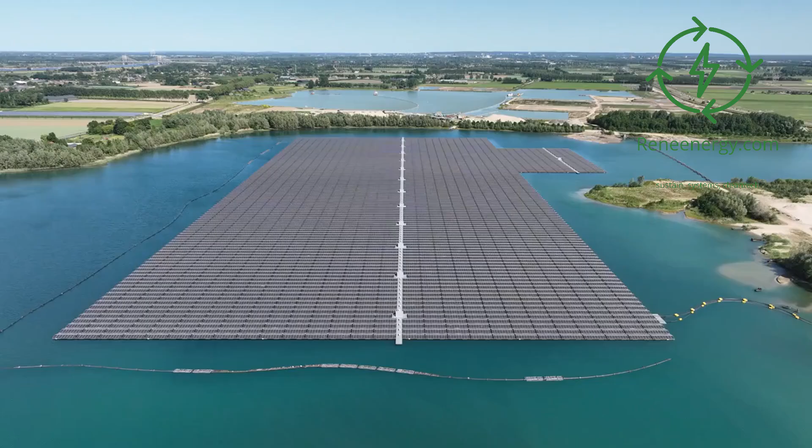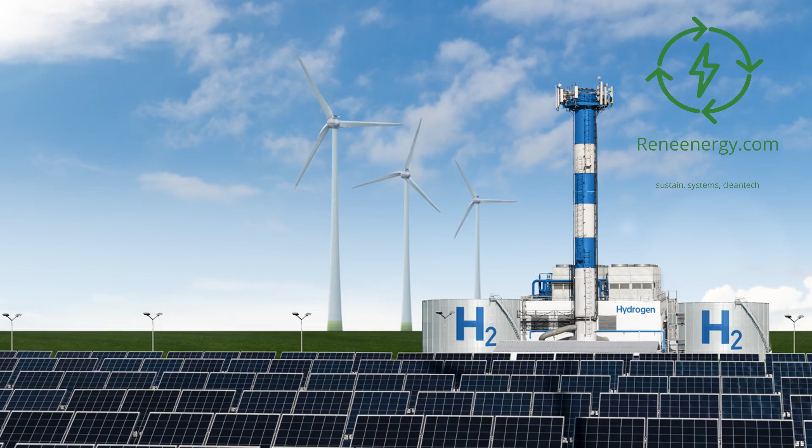Choosing the right technology for hydrogen production is crucial for the success and efficiency of your green hydrogen project. With the growing interest in hydrogen as a clean energy carrier, it is essential to understand the various production methods available and their implications for your specific project. This comprehensive guide will help you navigate the complex landscape of hydrogen production technologies and make an informed decision based on key factors such as resource availability, efficiency, cost, environmental impact, and scalability.

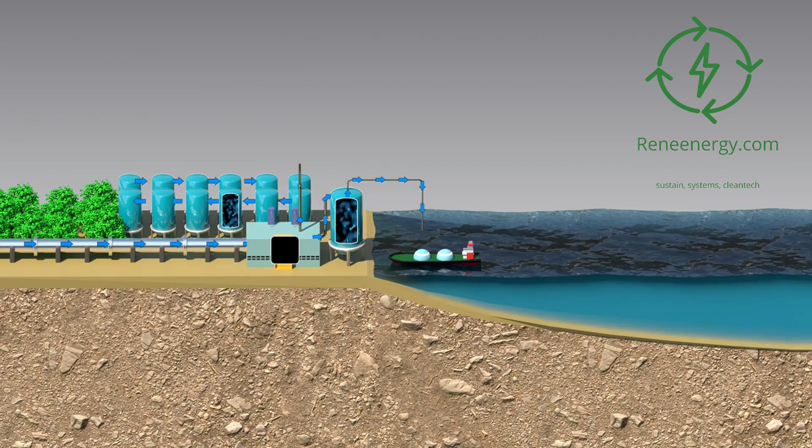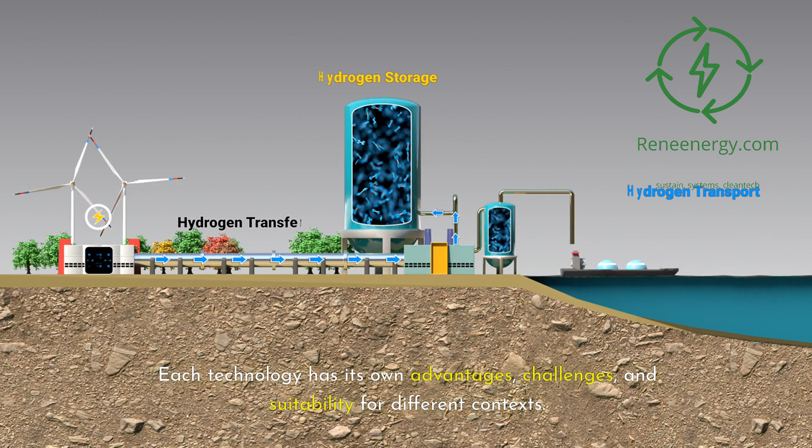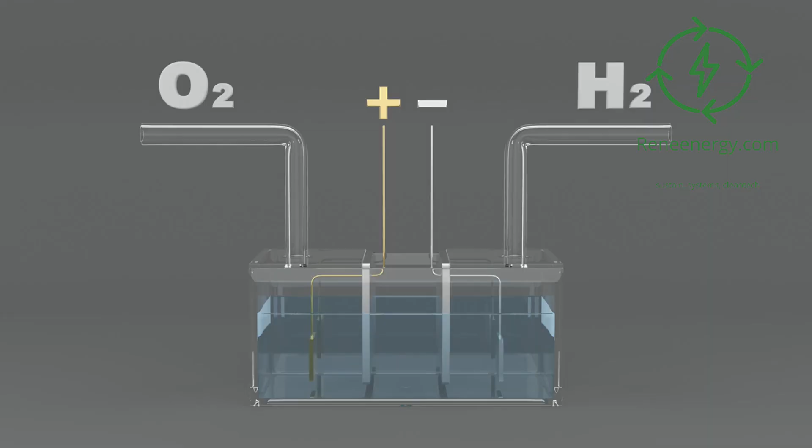1. Understand the different hydrogen production technologies. The first step in selecting the right technology for your project is to gain a thorough understanding of the various methods for producing hydrogen. Each technology has its own advantages, challenges, and suitability for different contexts. A. Electrolysis. Electrolysis is a process that uses electricity to split water into hydrogen and oxygen. If the electricity used in this process comes from renewable sources like solar, wind, or hydropower, the resulting hydrogen is considered green. There are three main types of electrolysis technologies.

Alkaline electrolysis. This is a well-established and widely used technology. It offers lower capital costs compared to other electrolysis methods but has lower efficiency. Alkaline electrolyzers are suitable for large-scale, centralized hydrogen production. Proton exchange membrane (PEM) electrolysis. PEM electrolyzers offer higher efficiency and are better suited for variable renewable energy sources due to their ability to respond quickly to changes in power input. However, they have higher capital costs compared to alkaline electrolyzers. PEM is ideal for distributed and small-scale hydrogen production.

Solid oxide electrolysis, SOE. SOE operates at high temperatures and can achieve high efficiency. It has the potential to use waste heat from other processes, increasing overall system efficiency. However, SOE is still in the development stage and faces challenges related to material durability and cost.

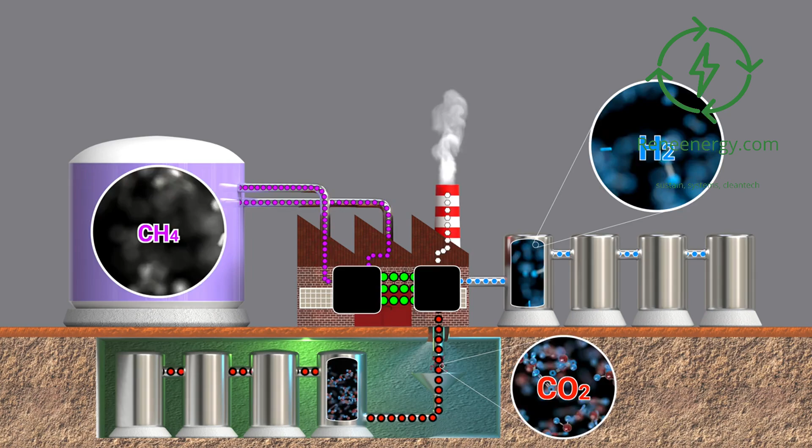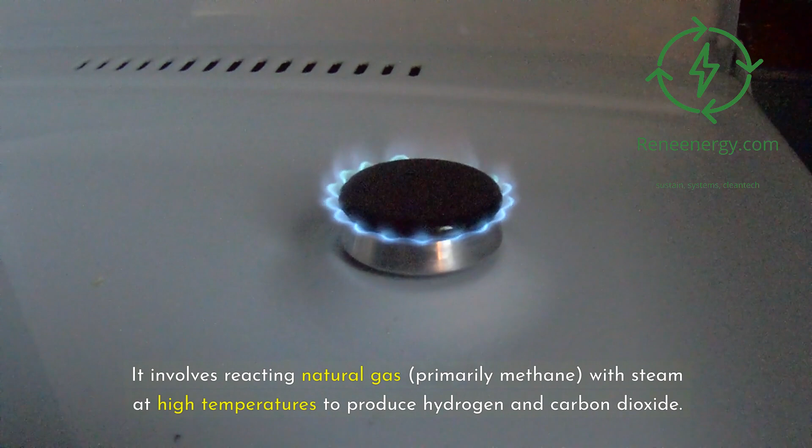B. Steam methane reforming, SMR, with carbon capture. SMR is currently the most common method for producing hydrogen at a large scale. It involves reacting natural gas, primarily methane, with steam at high temperatures to produce hydrogen and carbon dioxide. When combined with carbon capture and storage (CCS) technologies, the CO2 emissions can be significantly reduced, resulting in what is referred to as blue hydrogen. While not as clean as green hydrogen, blue hydrogen can serve as a transitional solution until green hydrogen becomes more cost competitive.

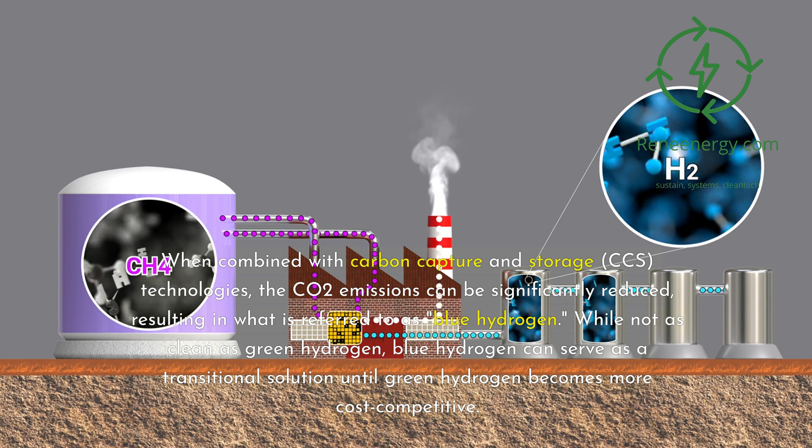C. Biomass gasification. Biomass gasification converts organic materials, such as agricultural waste, forestry residues, or energy crops, into a mixture of gases called syngas, which contains hydrogen. The carbon neutrality of this method depends on the sustainability of the biomass feedstock and the overall process. Biomass gasification can be a suitable option for regions with abundant biomass resources. D. Thermochemical water splitting. Thermochemical water splitting uses high-temperature heat from sources like nuclear reactors or concentrated solar power to drive a series of chemical reactions that ultimately split water into hydrogen and oxygen. This technology is still in the research and development phase but holds promise for efficient, large-scale hydrogen production.

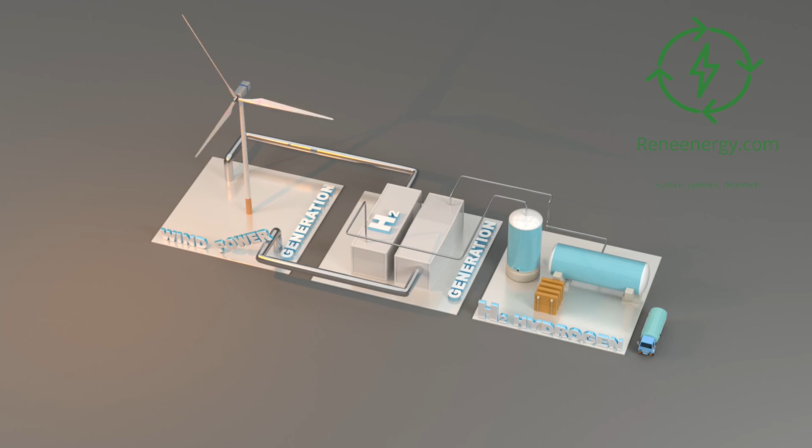2. Evaluate the availability of resources. The availability and accessibility of key resources is a critical factor in determining the feasibility and cost-effectiveness of different hydrogen production technologies. A. Renewable energy for green hydrogen production via electrolysis. Assess the availability, reliability, and cost of renewable energy sources in your project location. Consider factors such as solar irradiation, wind speeds, or proximity to hydropower facilities. Ensure that the renewable energy supply can meet the demand of your hydrogen production process consistently.

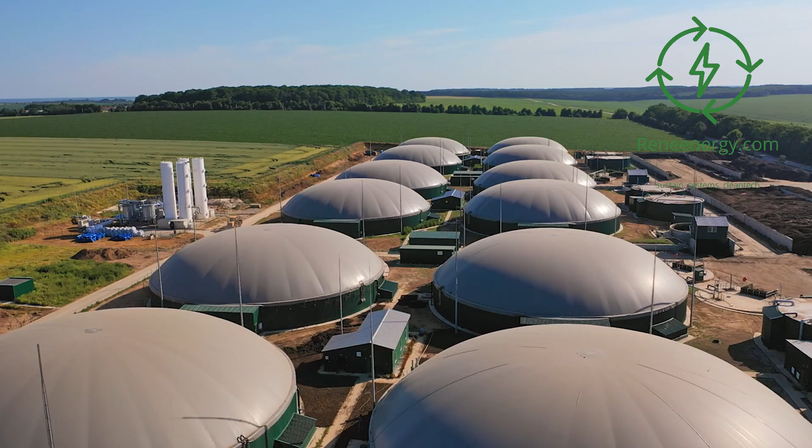B. Water supply. Water is a crucial input for electrolysis. Evaluate the availability, quality, and sustainability of the water supply in your project area. Consider the potential impact of water consumption on local ecosystems and communities, and explore opportunities for water recycling or desalination if necessary. C. Feedstock. For technologies like SMR or biomass gasification, the availability and cost of feedstock materials are essential considerations. Assess the long-term supply and price stability of natural gas or biomass resources in your region. Consider the environmental and social implications of feedstock sourcing, such as the impact of natural gas extraction or the sustainability of biomass cultivation.

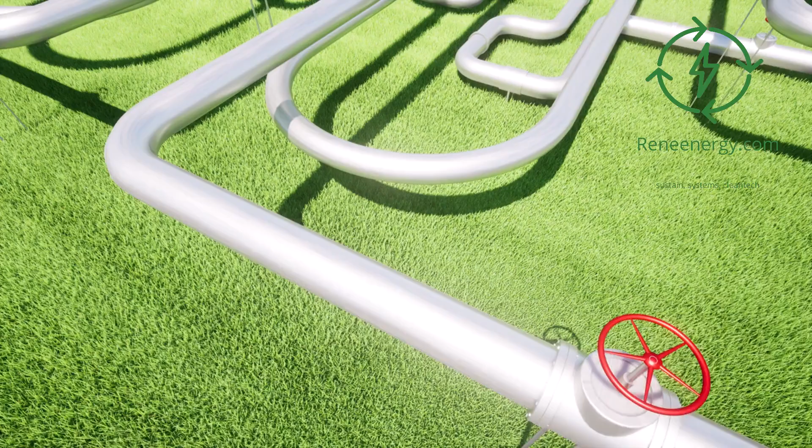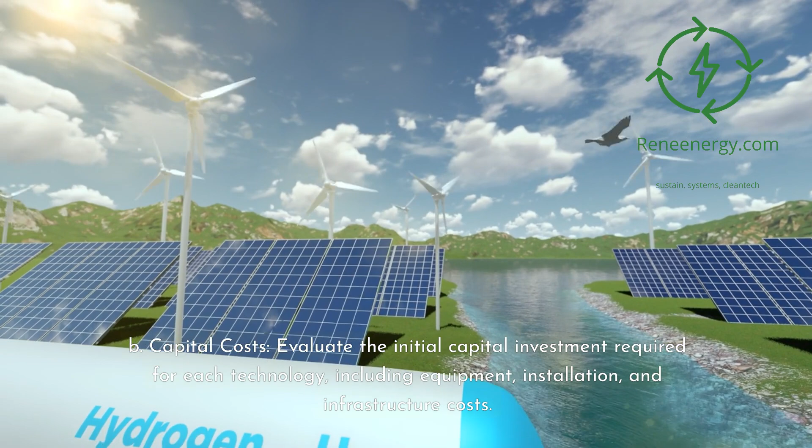3. Consider efficiency and cost. The efficiency and cost of hydrogen production technologies are key drivers of project viability and competitiveness. A. Efficiency. Compare the energy efficiency of different technologies, which is the ratio of hydrogen output to energy input. Higher efficiency generally translates to lower operational costs and reduced environmental impact. Consider both the nominal efficiency under optimal conditions and the real-world efficiency under varying operating conditions. B. Capital costs. Evaluate the initial capital investment required for each technology, including equipment, installation, and infrastructure costs. Consider the economies of scale and the potential for cost reductions as technologies mature and market demand grows.

C. Operational costs. Assess the ongoing operational and maintenance costs associated with each technology. This includes expenses related to energy consumption, feedstock procurement, water treatment, labor, and equipment maintenance. Consider the impact of fluctuating energy and feedstock prices on long-term operational costs.

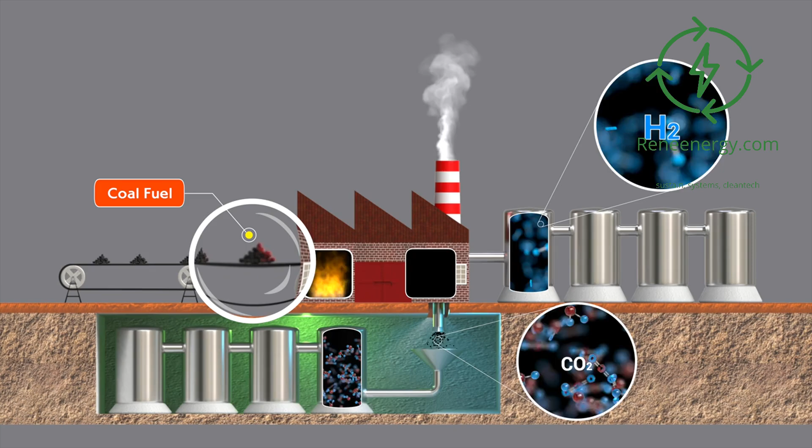4. Assess environmental impact. The environmental performance of hydrogen production technologies is a critical consideration, especially in the context of decarbonization goals and sustainability commitments. A. Emissions. Evaluate the carbon footprint and other greenhouse gas emissions associated with each technology. Consider both direct emissions from the production process and indirect emissions from upstream and downstream activities, such as feedstock extraction or transportation. B. Sustainability.

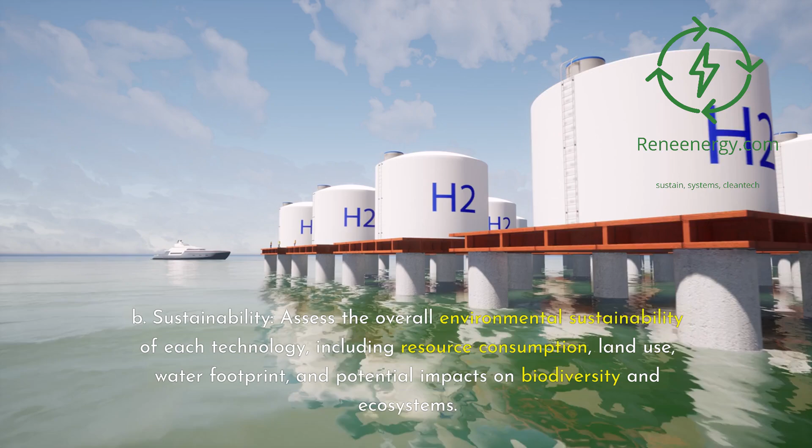Assess the overall environmental sustainability of each technology, including resource consumption, land use, water footprint, and potential impacts on biodiversity and ecosystems. Consider the life cycle environmental impact of the technology, from raw material extraction to end-of-life disposal.

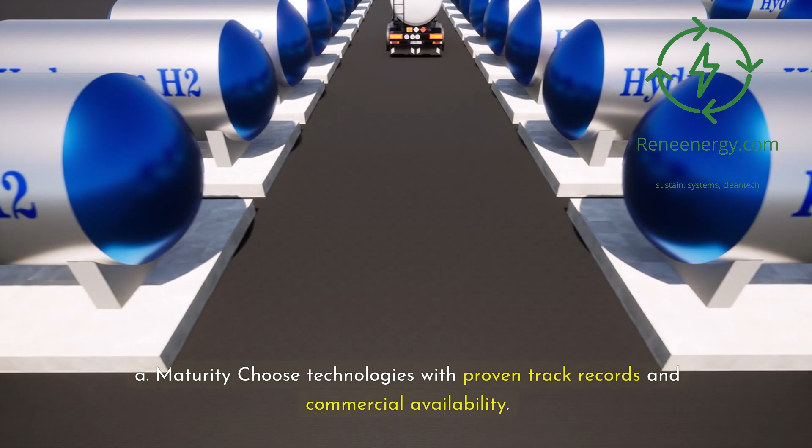Review technological maturity and scalability. The maturity and scalability of hydrogen production technologies are important factors in determining their suitability for your project. A. Maturity. Choose technologies with proven track records and commercial availability. Assess the level of technological readiness and the existence of successful reference projects at a similar scale. Consider the availability of skilled personnel and supply chains to support the selected technology.

B. Scalability. Ensure that the chosen technology can be scaled up to meet your project's future growth requirements. Consider the modular nature of the technology and its ability to adapt to increasing hydrogen demand. Assess the potential for cost reductions and efficiency improvements as the technology scales up.

Regulatory and policy environment. The regulatory and policy landscape can significantly influence the viability and attractiveness of different hydrogen production technologies. A. Incentives and subsidies. Investigate government incentives, subsidies, and support programs available for specific hydrogen production technologies. Consider how these incentives align with your project's goals and timeline. Assess the stability and long-term availability of these support mechanisms.

B. Compliance. Ensure that the chosen technology complies with local, national, and international regulations and standards related to safety, environmental protection, and quality control. Consider the potential impact of future regulatory changes on the technology's viability and cost competitiveness.

Future proofing and flexibility. In a rapidly evolving hydrogen landscape, it is crucial to consider the long-term adaptability and flexibility of hydrogen production technologies. A. Innovation. Choose technologies that are adaptable to future advancements and innovations in the field. Consider the potential for efficiency improvements, cost reductions, and integration with emerging technologies like fuel cells or hydrogen storage solutions.

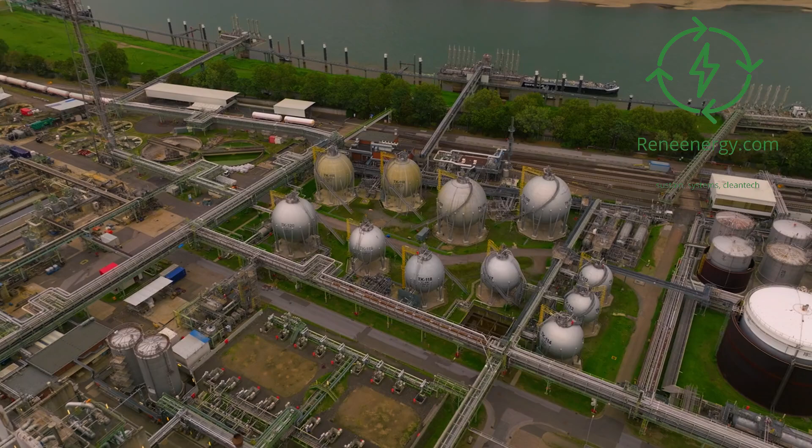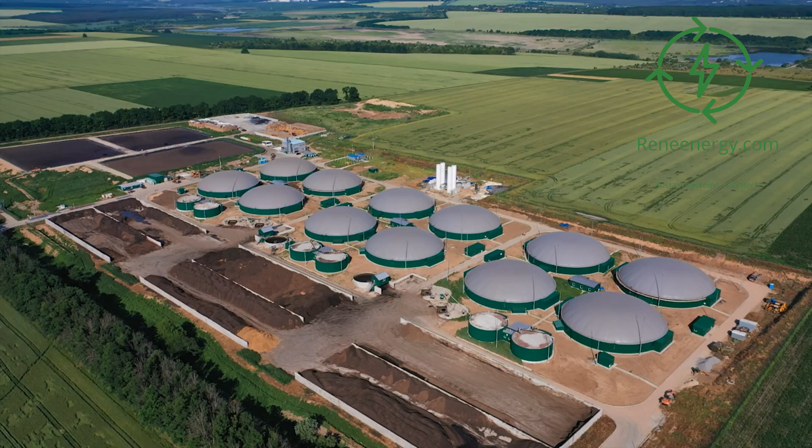Technical support and expertise. The availability of technical support and expertise is essential for the successful implementation and operation of hydrogen production technologies. A. Vendor support. Evaluate the level of technical support and expertise offered by technology providers. Consider factors such as the availability of local support teams, response times, and the quality of documentation and training materials.

B. Training and skills. Ensure that your organization has or can develop the necessary skills and knowledge to operate and maintain the chosen technology. Consider the availability of training programs, knowledge transfer opportunities, and the potential to build in-house expertise over time.

Conclusion. Choosing the right technology for hydrogen production is a complex decision that requires a comprehensive analysis of various factors. By carefully evaluating resource availability, efficiency, cost, environmental impact, scalability, regulatory environment, and technological maturity, you can select the most suitable technology for your green hydrogen project. It is essential to take a holistic approach and consider the long-term implications of your technology choice.

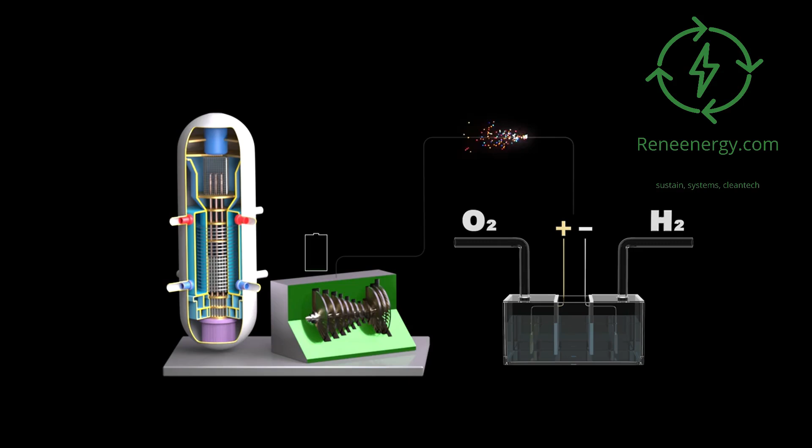Engage with industry experts, technology providers, and relevant stakeholders to gather diverse perspectives and insights. Conduct thorough feasibility studies and techno-economic analyses to validate your assumptions and projections. Remember that the hydrogen landscape is continuously evolving, with new technologies and innovations emerging regularly. Stay informed about the latest developments and be prepared to adapt your strategy as the market and regulatory environment change.

By following this comprehensive guide and leveraging the additional resources provided, you will be well equipped to make an informed decision on the right hydrogen production technology for your project. With the right technology choice, coupled with sound project management and stakeholder engagement, you can contribute to the global transition towards a clean, sustainable, and hydrogen-powered future.